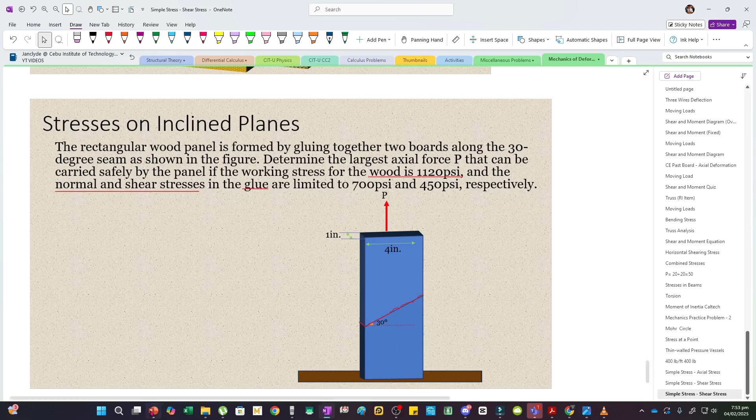Meron tayong working stress ng wood, and then meron ding normal and shear stresses para sa glue. So ito yung glue. Dalawang objects kasi yan, tapos ginlue para maconnect. Essentially, parang ito yan. Ito yung body natin, at merong glue dyan. Now, we can transmit the load P sa plane na to.

Pero notice na this is a purely vertical force. Hindi siya perpendicular nor parallel to the plane. So what we need to do is kunin natin yung component of P parallel to the plane and perpendicular to the plane. Tingnan natin yan in 3D.

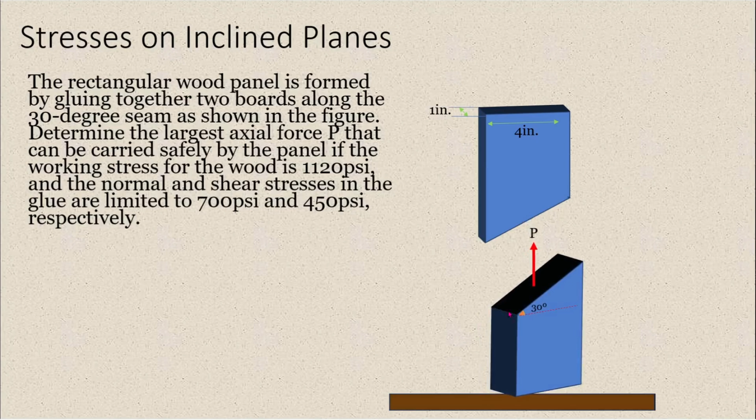Ito yung figure niya. Andito yung glue. Copy ko na lang to, tapos dyan nakalagay yung glue. Itong force P, kailangan natin kunin yung components niya. Pero saan muna tayo mag-start? Sa working stress ng wood muna, kasi ito yung pinakamadali.

Based on the working stress of the wood, we have our force P, and this is 1120 psi, pounds per square inch. Automatic lang, para sa wood, perpendicular force yan sa cross-section natin. So we would have P, then this cross-sectional area is equal to 1 inch multiplied by 4 inches. Solving for P, we would have 1120 multiplied by 4, which is 4480 pounds. Ito yung makakaya ng wood mismo.

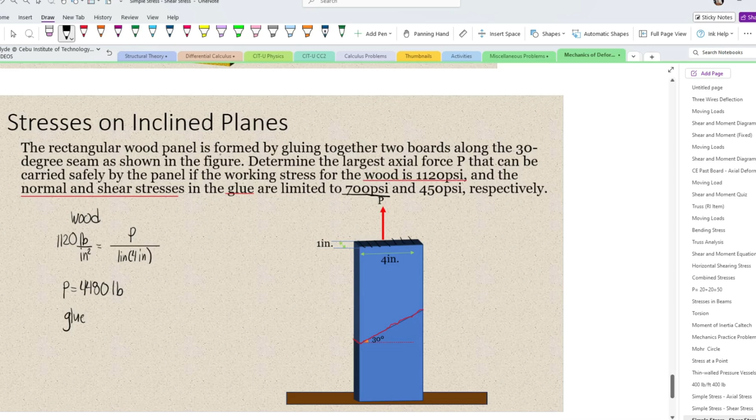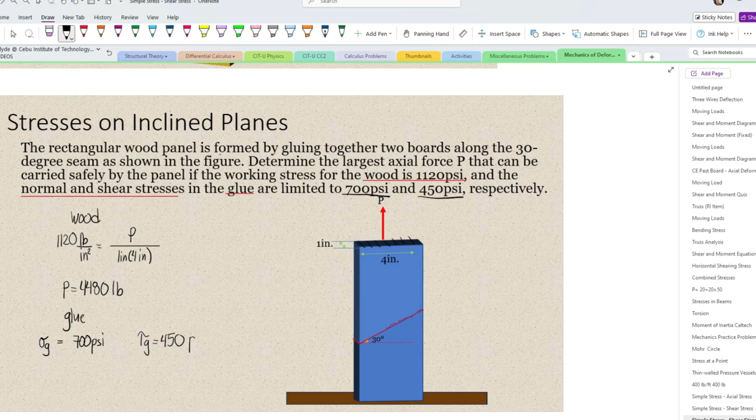Pero iba din sa glue. Para sa glue, meron tayong normal stress, which is 700 psi. Tawagin natin siyang sigma glue. Tapos yung shear stress naman ng glue, sabihin natin, tau glue is equal to 450 psi. Dito muna tayo sa normal stress niya. Depende sa preference mo saan ka magsa-start.

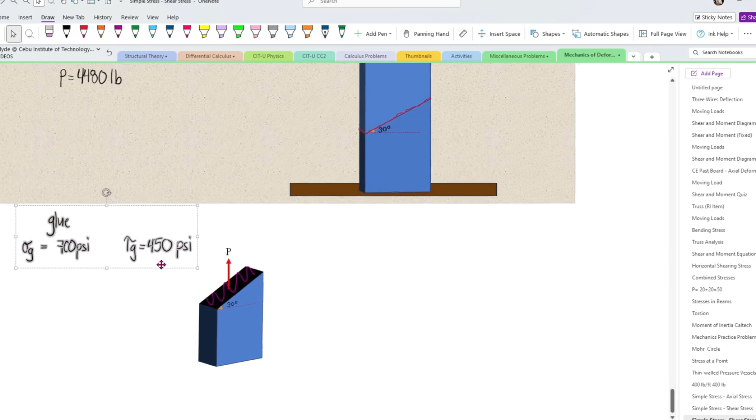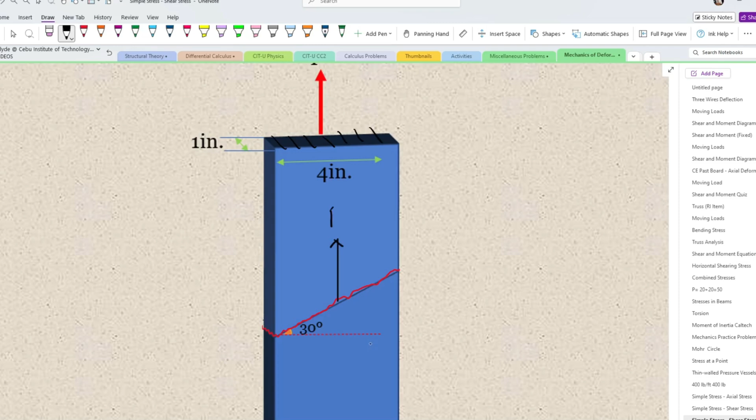So ito yung force P natin. Mas maganda kapag ito na lang yung i-analyze natin. Yung force P is tensile, acting away from the body. Pwede natin yung i-transmit dito. So ito yung P, tapos i-component natin siya. Kung gusto mong kunin yung components ng force, automatic yan na ito na yung magiging hypotenuse ng triangle mo.

So we can draw the component of P that's acting normal to the plane. Ibahin natin yung kulay, at draw tayo ng perpendicular line. Parang ito yung component ng P which is normal to the plane, tawagin natin Pn. And then meron din component yung P which is parallel to the plane, draw natin yan. Ito yung P, sabihin natin Pv, yung shear force.

Now let's try to analyze the angle. Diba, this is 30 degrees. So we can draw a horizontal line sa point na to. If this is 30 degrees, then this must also be 30 degrees, kasi interior angle with respect to the horizontal.

Kapag 30 degrees yan, itong matitirang angle, this would be equal to 60 degrees. Bakit 60 degrees? Perpendicular kasi yan, so the sum of these angles must equal 90. 60 plus 30 is equal to 90. Itong angle na to, notice na perpendicular din to. This is a horizontal line, this is a vertical line, so the sum of these angles must equal 90. Kapag 60 yan, then this must be equal to 30 degrees. So again, this is also perpendicular.

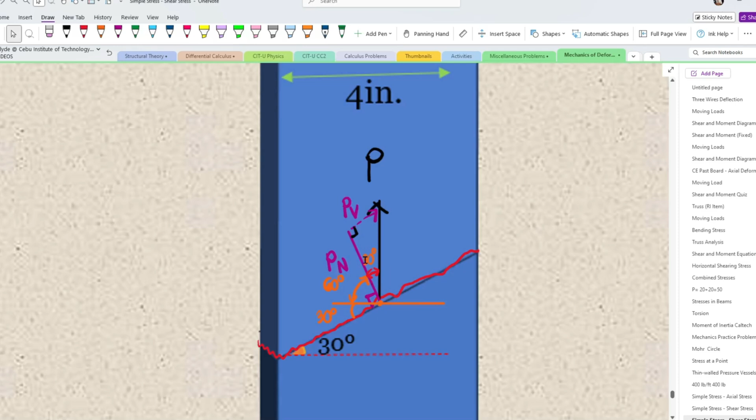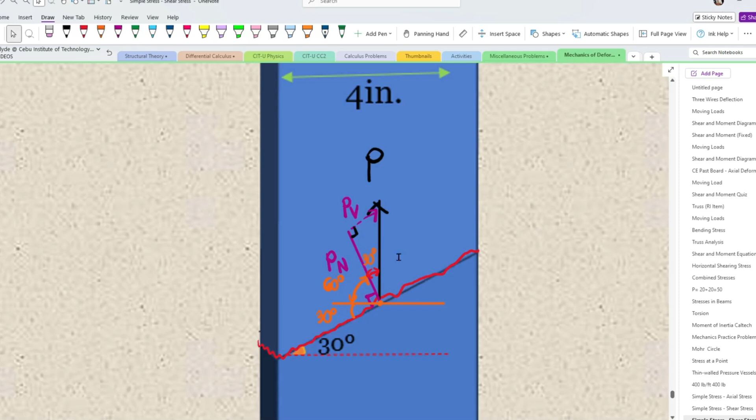Ang way ko ng pag-iisip nito, kung ano yung angle dito with respect to the horizontal, kapag meron kang force na perpendicular, yung with respect to the horizontal, magiging with respect to the vertical na. Pwede mong gawin ganyan para automatic na. So yung PN, this corresponds to the axial force, perpendicular kasi yan sa plane natin. This is acting away from the body, so our PN would be P.

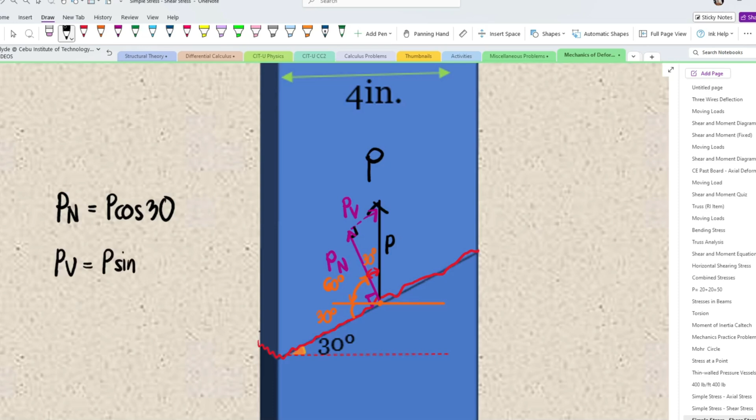Essentially, ito yung P, yung hypotenuse, and then kunin natin yung PN, it would be P cosine 30. And then PV naman, this is our reference angle, opposite yung PV sa kanya, so this is P sine 30. However, hindi pa natin alam yung area.

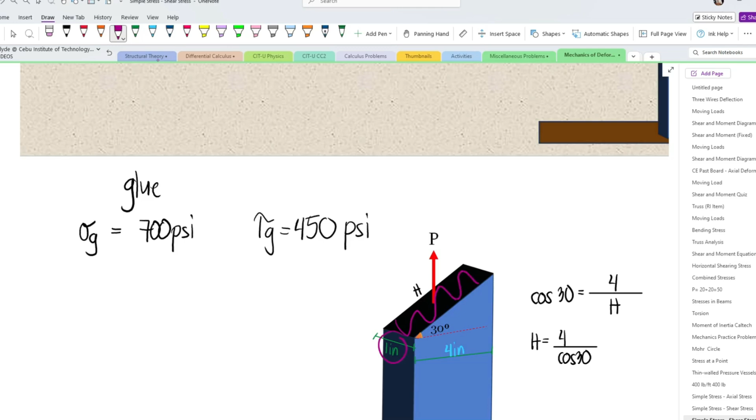Ganito yung pag-compute. Alam natin na this is 1 inch, tapos ito naman, horizontally, this is 4 inches. Now we want this distance, kasi yung distance na yan, multiply by 1 inch, yan yung area ng plane na to. So we can use the cosine function kasi meron tayong adjacent side and then we want the hypotenuse. Cosine of 30 degrees equals adjacent, which is 4, divided by the hypotenuse, h. So h would be equal to 4 divided by cosine 30. Yung area na yan is equal to 1 inch multiplied by 4 divided by cosine 30. Yan yung area para sa normal stress and the shear stress.

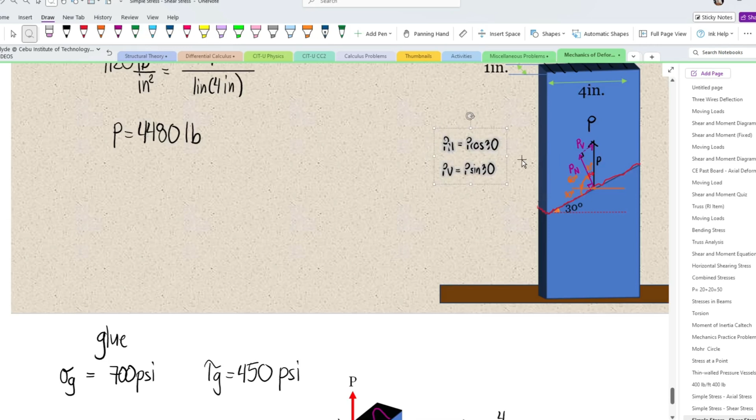Copy ko na lang to. Dito muna tayo sa normal stress ng glue. We have 700 psi, pounds per square inch, equals force. The normal force is P cosine 30 - this is axial, ito naman shear. Divide natin to by the area, which is 1 inch multiplied by 4 divided by cosine 30, inches din. Tapos masosolve na natin yung P.

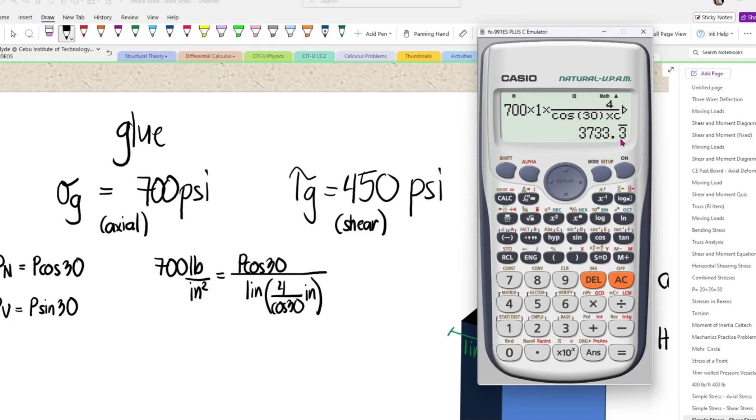We would have 700 times 1 times 4 divided by cosine 30. Hindi na necessary yung 1, nilagay ko na lang. And since merong cosine 30 dyan, divide this by cosine 30 - multiply na lang dito, cosine 30. So we would have 3733.33. Ito yung force na makakaya according to the axial stress of the glue, naka-pounds din yan.

Finally, for the shear stress, we have 450 psi. And our PV is P sine 30 equals P sine 30. Divide natin by the area, still 1 inch multiplied by 4 divided by cosine 30, inches din yan. Modify na lang natin to - this is now 450, then same area lang, but ito, magiging sine 30.

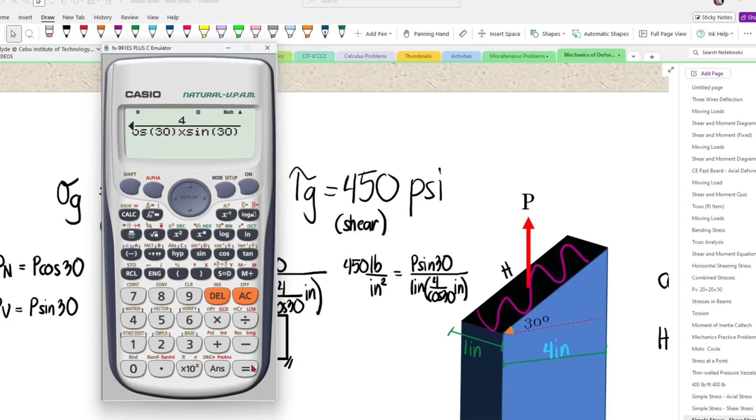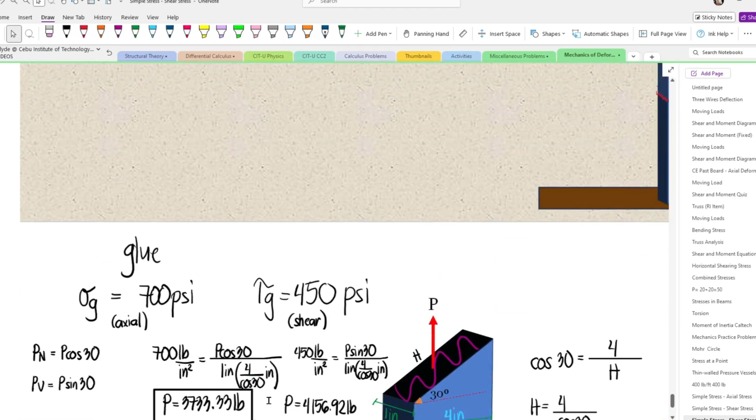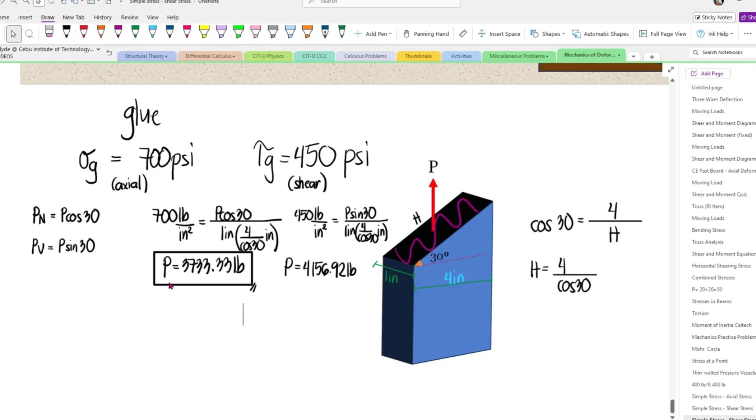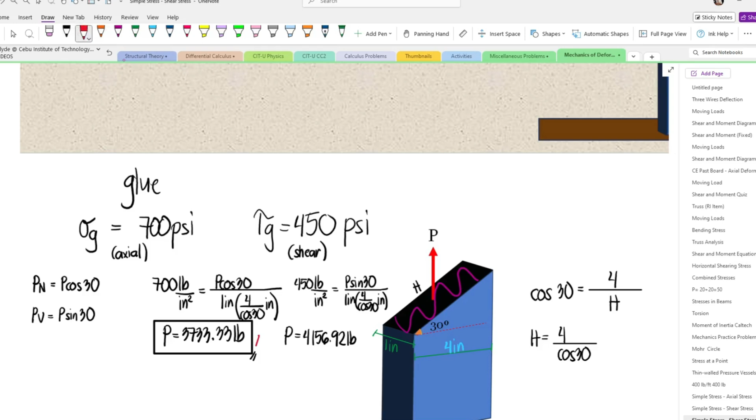Or you can just use shift solve, depende na yan sa preference mo. So magiging 4156.92, and this is pounds. Yung pipiliin natin dyan would be the smallest or the least of the following values: merong 4480, 4156, saka 3733. So ito yung least load, therefore we can only apply this force para hindi mag-fail yung glue saka yung wood. Yung design kasi is para sa buong system. So ito na yung sagot natin.